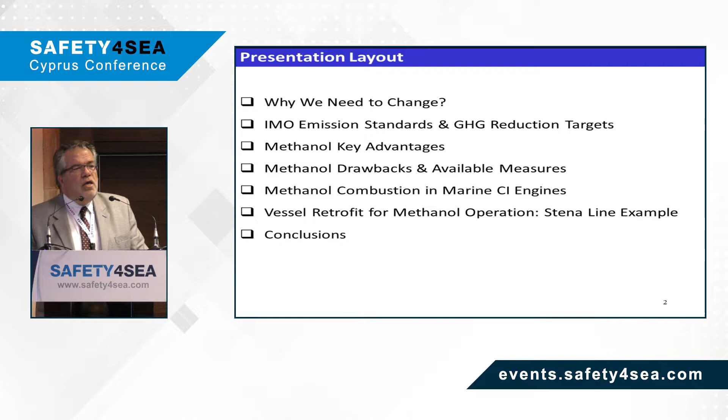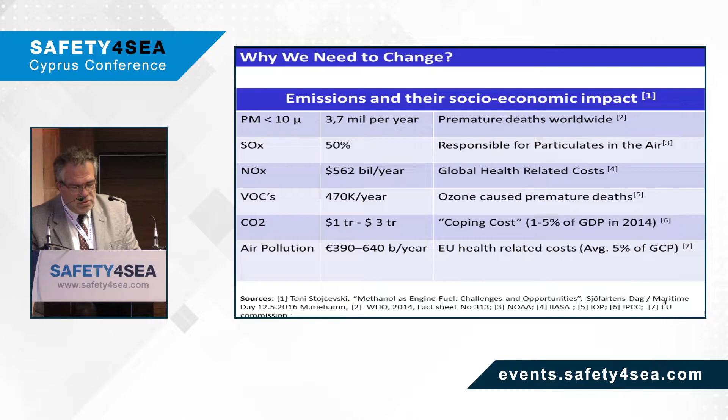So we are forced, the academics, the researchers, we are forced to deal with new technologies. We have a lot of damages, a lot of hazardous emissions. We have a rough estimation on the slide about the socio-economic cost of these hazardous emissions. So, what do we have to do? What do we need to do?

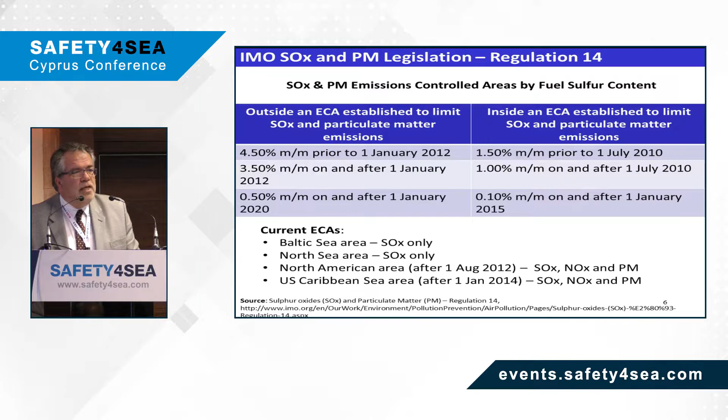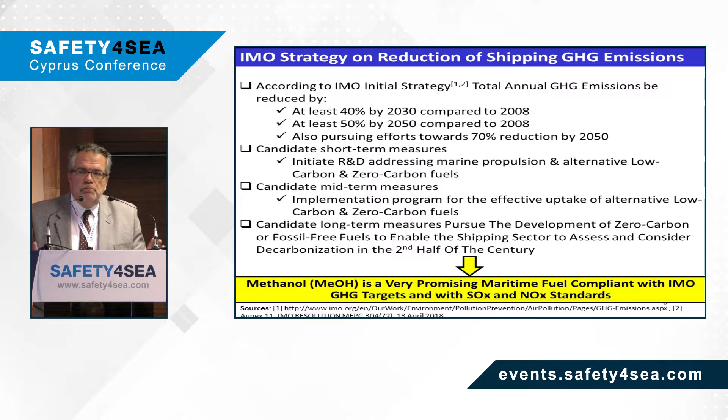There is a series of restrictions already shown in this room today, so I have to pass these slides and go directly to a potential solution, to methanol. So we have carried out a theoretical investigation using our software developed in the Hellenic Naval Academy, and we have also validated this software with the experimental work of colleagues around the world.

So there are some things we could call advantages. Methanol is available. We have 70 million tons which are produced annually. The major source is natural gas, but we could also produce biomethanol from biomass. When we burn methanol, the combustion produces no SOx and very low NOx.

Regarding the logistics and the infrastructure, minor modifications are required for storage, distribution, and bunkering. Methanol prices show regional variation. They are competitive in key shipping regions, and they are generally competitive during reduction of oil prices. Dual fuel engines using methanol and diesel oil perform lower specific fuel oil consumption compared to diesel-only operation.

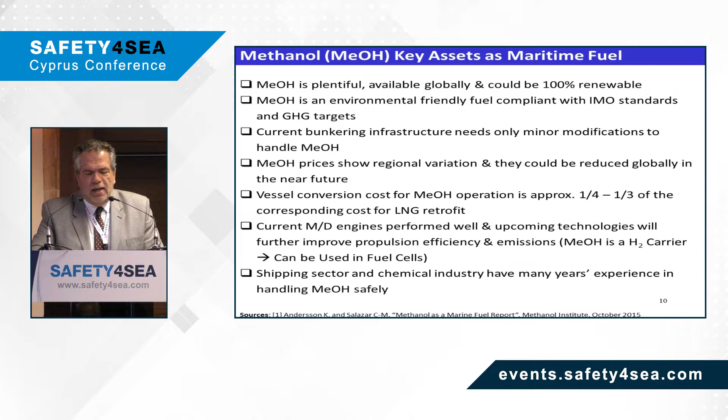Methanol could also be used as hydrogen carrier for fuel cell applications. And finally, shipping and chemical industries have over 100 years experience in producing, treating and handling methanol. In addition, regarding CO2, methanol seems to be equivalent to LNG, but LNG is not the final solution. Mixing with biomethanol could lead to a significant reduction.

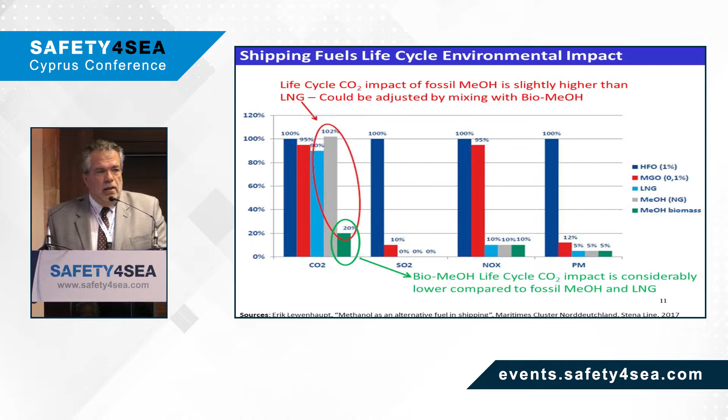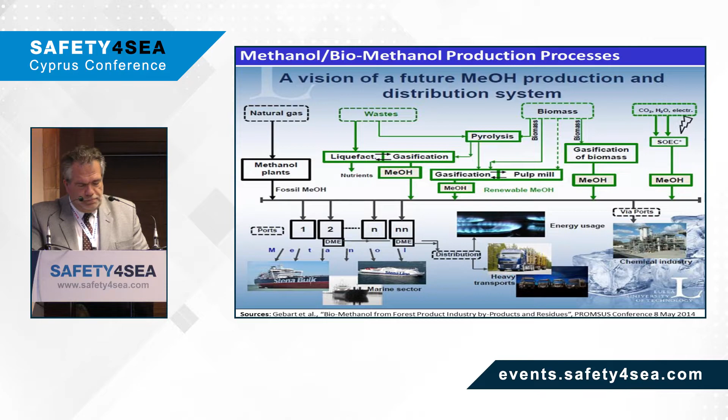Recent investigation suggests massive biomethanol production from waste, biomass, and CO2 plus water chemical reaction. But at the same time, methanol also has drawbacks. We hope there are countermeasures to avoid hazards, damages, and undesirable engine performance. We have to underline that for dual fuel use, there is no power reduction and no formaldehydes at the exhaust gases in case we use methanol for dual fuel combustion.

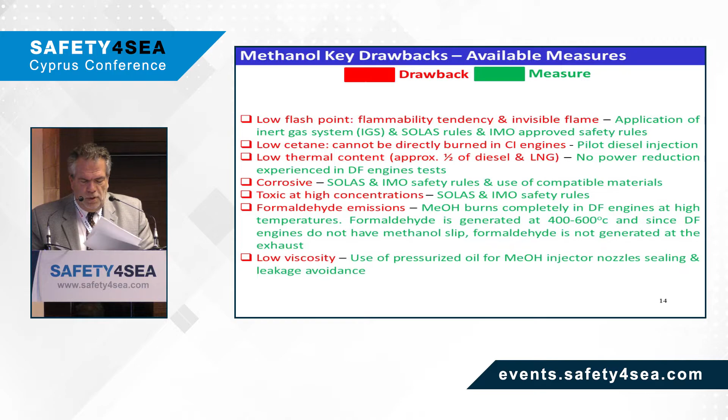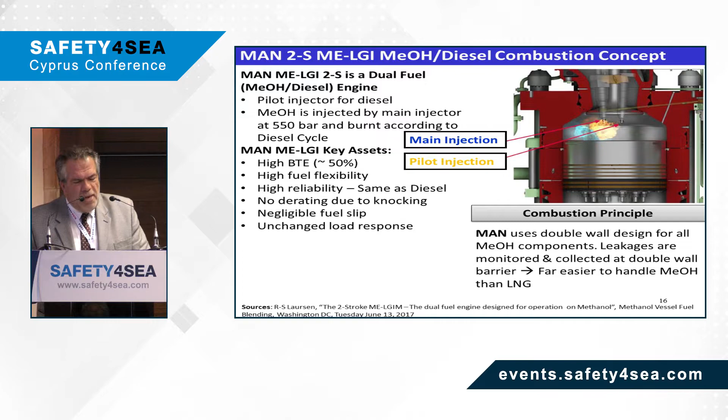Actually, there are two approaches, two different injection and combustion concepts. The one comes from MAN, the MAN design with main injection and pilot injection for the diesel. And the second approach is coming from Wärtsilä. We have a series of experiments that have been conducted to examine the engine behavior and compare different cases. Four cases are examined: diesel fuel oil, diesel plus EGR, methanol diesel, and methanol diesel plus EGR.

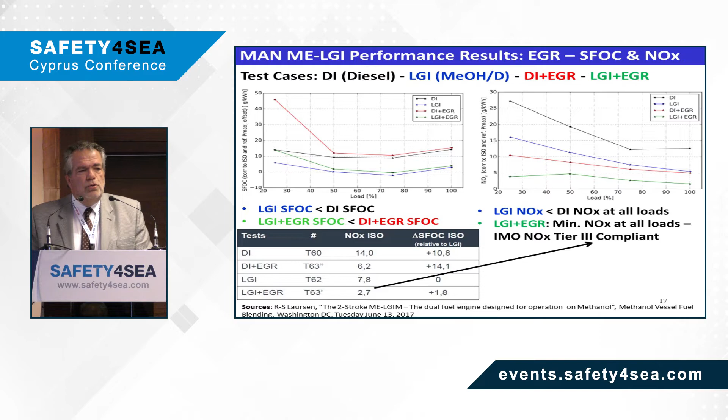In these two diagrams, we can see the specific fuel consumption and the NOx emissions for these cases and for different loads. There is also another way to reduce NOx. You can reduce NOx increasing water content, and we can have blends of methanol with water to decrease the NOx emissions.

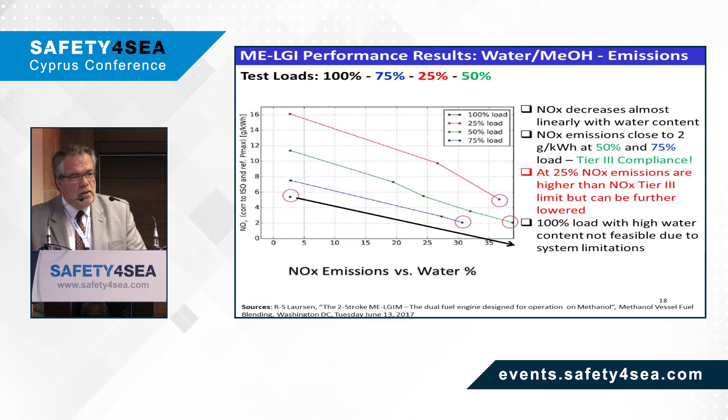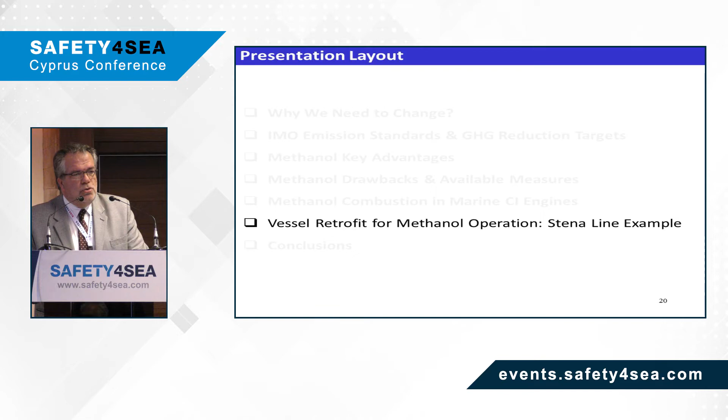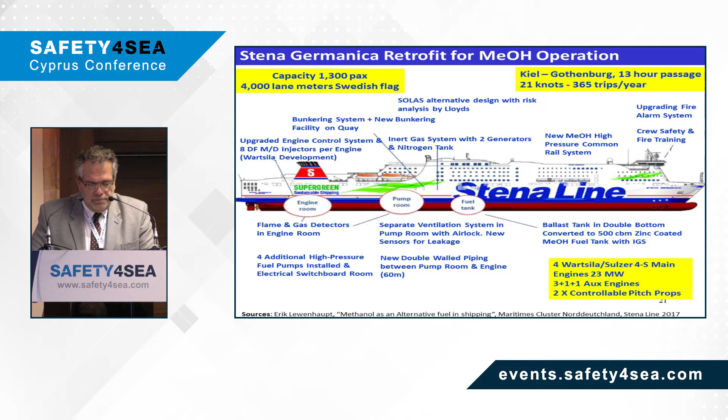Finally, I have to mention the second approach, the Wärtsilä approach, which was used for the Stena Line vessel, where the Stena Germanica uses Wärtsilä engines consuming methanol in dual fuel operation. And all the modifications used are shown on the slide. This is the solution, the modified engine for Stena Germanica.

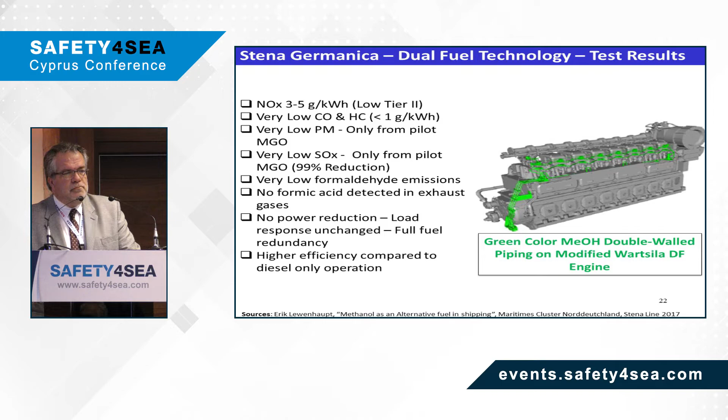Not the final solution, just an alternative, just a solution as a bridge to a new technology, a revolutionary new technology leading to zero emissions, carbon-free or fossil-free emissions.